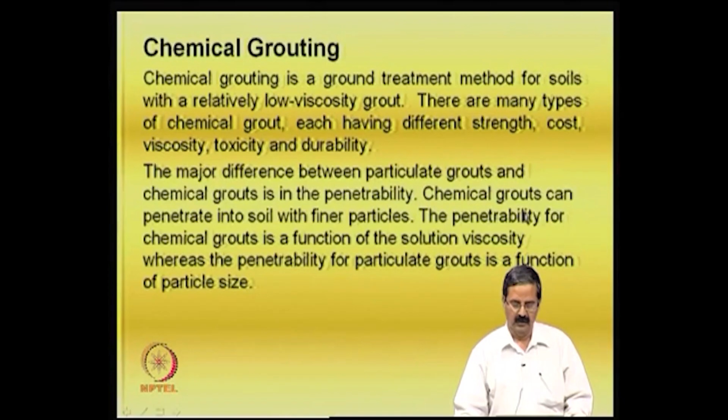function of particle size. This distinction is very necessary, because when you are trying to design a grout, you should know the size of the particles there. If the particles are somewhat coarser, one can go for particulate grouts, meaning particles in suspended form of bigger size. But when you want low viscosities, with the particle size being very low, you need to go for chemical grouts. This distinction is very essential.

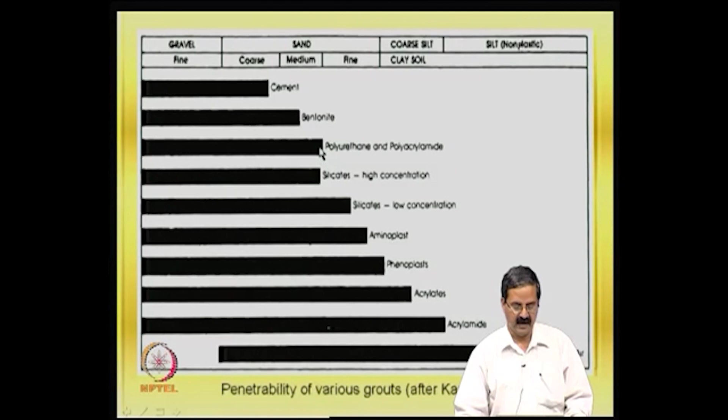You can see that chemical grouts have a big variation. Gravel, sand, coarse and silt sizes are here. Cement could be applicable to just this range, but cement plus bentonite or bentonite alone could be somewhat higher. Then polyurethane and polyacrylamide have somewhat higher ranges. Aminoplasts, acrylates and others have a bigger range of applicability depending on particle size. For example, this material could serve a big range of particle sizes, from gravel to coarse silts or clay soils as well

to some extent. With compressed air, if you inject compressed air into the system along with the grout, it enhances the whole process and can be useful in some of these grouting systems to increase efficiency.

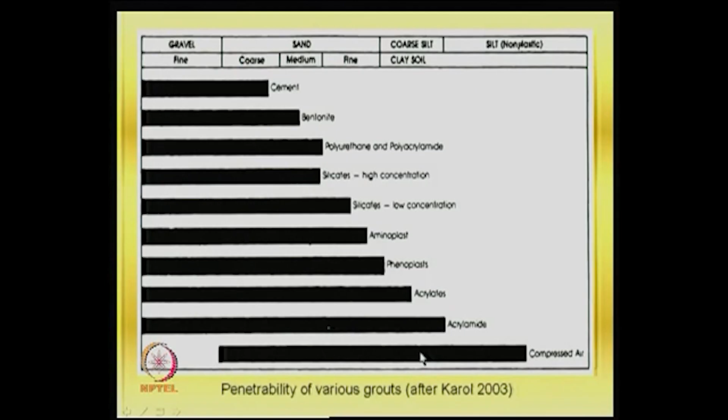This is another table that one should have a look at. Depending on the type of chemical grout, it could be sodium silicate, lignochromes, a variety of materials, and their properties are given here. The viscosity is given in pascal-seconds. Gel time is something we need to understand, meaning the hardening or setting time, and it is given in minutes.

Polyurethane reacts instantly with water, whereas aminoplasts take some time. Then strength in coarse sand: what order of strength do they get? You can see it is quite good in MPa. The unconfined compression strength of clay or sand could be very low, even 1/100th of this or much less. But by adding some of these materials, it gets improved by this much, which is quite good.

There are some issues like risk and toxicity, because they are chemical in nature, and so there is some risk associated with that. It can be a risk in terms of skin allergy and all that. Silicate, of course, is a household chemical. Phenolic resins are respiratory irritants, caustic. In some places acrylic resins are banned because they are neurotoxic, and respiratory irritants as well.

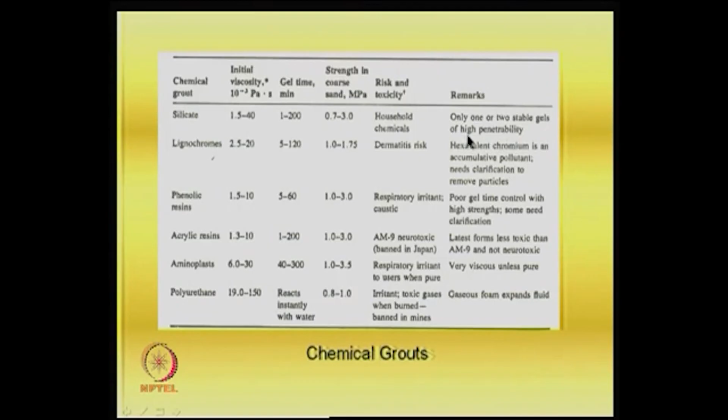Some remarks are also here about in what form it is better. For example, silicate - only 1 or 2 stable gels of high penetrability are there, and for lignochromes, hexavalent chromium is an accumulative pollutant and needs clarification to remove particles.

The other chemicals have poor gel time control with high strengths, for certain needs one should really do some sort of analysis, because the fact that you have so many chemicals does not mean you can use them directly. One should do a lot of studies with the chemistry background, and see that they are effective and also do not cause difficulties when handling in the field.

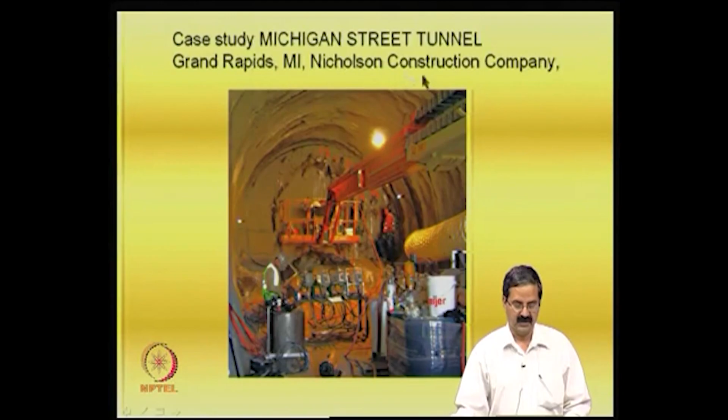I will give small examples here. This is in Michigan Street, where one construction company did this. This is a tunnel that was about to cave in. It is about 31 meters long, 6 meters diameter, constructed using the New Austrian Method of tunneling. This is one method for construction of tunnels.

Because the site's conditions primarily consist of fine sand, chemical grouting was specified to stabilize the sand and enable open face tunneling. Since a fine sand material is there, it definitely caves in, and to increase that strength when doing open face tunneling, one should stabilize it. That company stabilized it with a sodium silicate based grout.

The chemical grout was injected through 41 tube-a-manchette sleeves, each one over 100 feet long. These manchette sleeves were drilled horizontally to maintain an active undisturbed roadway above. The grout is placed ahead of what you are trying to drill.

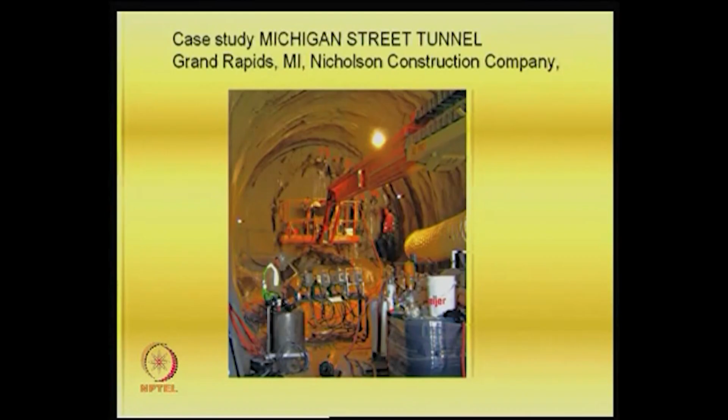The chemical grouting process created a treated mass of stabilized sand, so that the tunnel could be excavated with less risk of overburden collapse. If you are able to stabilize the area much before you start tunneling using this process, then it is fine. That is what this company did. It is a very important case study, very applicable to many of the conditions we have in underground water and all that.

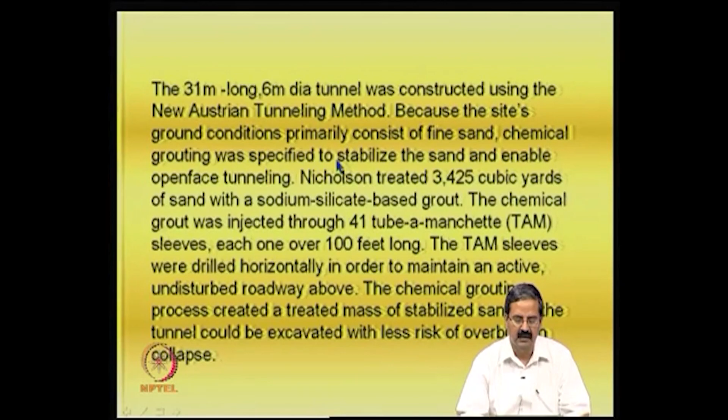Another important point is that there have been many case studies, particularly for underground water control. There is some literature that clearly says chemical grouting has been studied for about 30 to 40 years, and they are quite effective in controlling the infiltration and inflow of underground water into underground structures. There is seepage also.

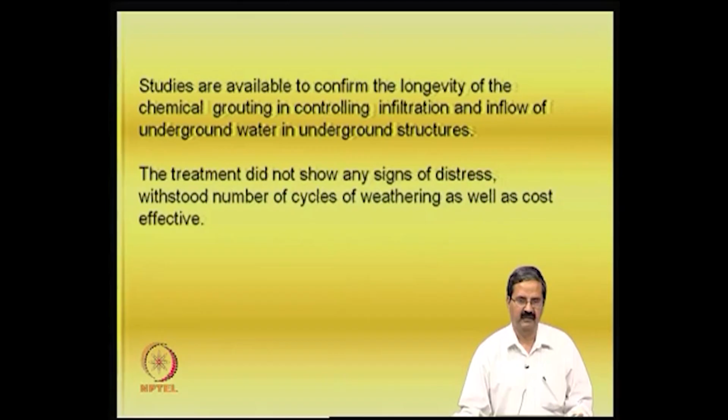How is it effective? Some experiments have been done which show that these materials did not show any signs of distress and withstood a number of cycles of weathering, as well as being cost effective. We always have apprehensions about whether it is going to be cost effective, whether it is going to be durable in the long run - after applying a chemical, after a few years it should not collapse, and whether it leads to other issues. People have studied this for at least some cases and shown that chemical grouting is definitely quite useful.

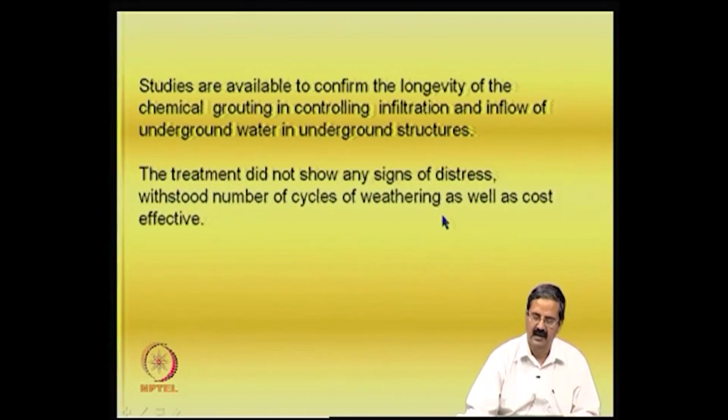I would like to stress on some more important points here. There is a spelling mistake, so rheology of grouts, it is here.

The rheology has three considerations: stability, setting time and viscosity. Stability is nothing but you consider the suspension stable if the particles remain in suspension until they reach a destination. Setting time is the time required for the grout to harden, and it is in the range of 4 to 24 hours depending on the additive used. Viscosity is a proportionality factor or constant relating shear resistance to the velocity gradient.

Like I said, there is a force applied, and they are all viscous fluids. Water is one example. Water has a very poor shear resistance, but when you start adding some chemicals or solids like sands or cement, then it achieves some increase in shear resistance.

So we also use a simple law where we assume, as I just mentioned, the coefficient of viscosity we calculate, and this is a simple example of calculation of viscosity here.

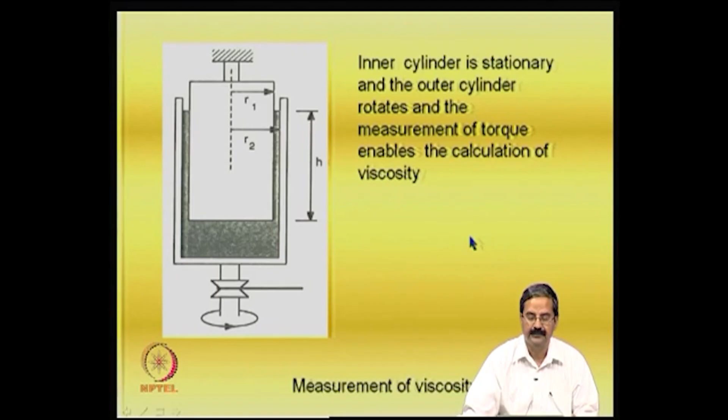In fact, people have been trying to understand the rheology of fluids particularly. So we have what is called frictional resistance, and we say it is a Newtonian model we use.

What it means is that this is a concept that we have. The way you want to model a grout is that the grout has a frictional resistance, and the moment you apply a force, it has some frictional resistance, and also it has what is called the viscous effects. So to model that we use a simple approach, and we call it a Bingham body.

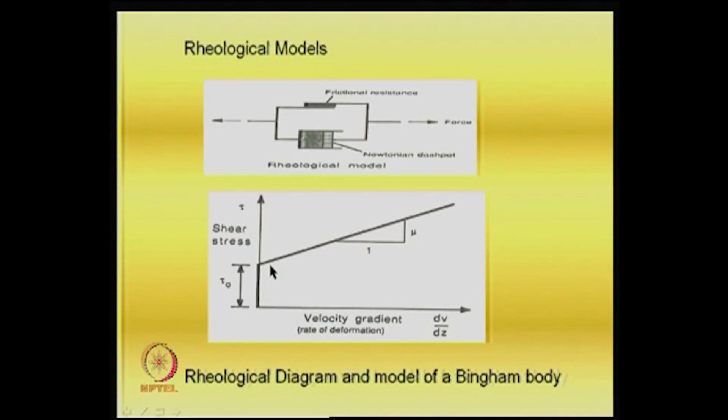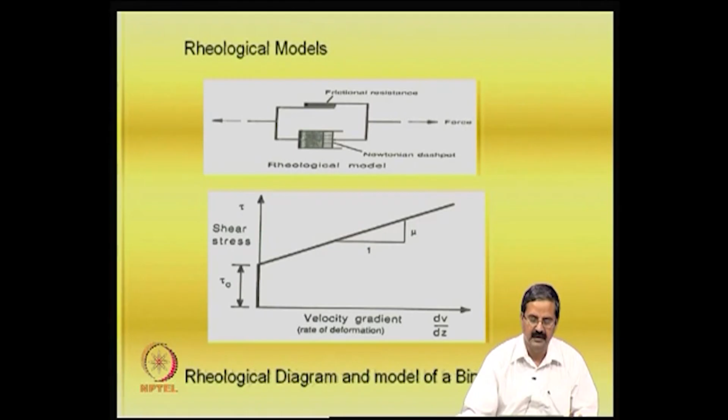Say, for example, in this case you start trying to allow the liquid to flow. It has to overcome initial shear resistance, which we call tau naught, and then as the velocity gradient increases, shear stress also increases. This is a simple law. We are familiar with Newtonian and non-Newtonian fluids; this we assume is a Newtonian fluid.

The rheological behavior of the Bingham body is expressed as tau equals tau naught plus mu dv by dz, and this particular term is called rigidity. A thin plate with rough surfaces is immersed in the grout, and the initial stress can be calculated from the amount of grout sticking to the surface.

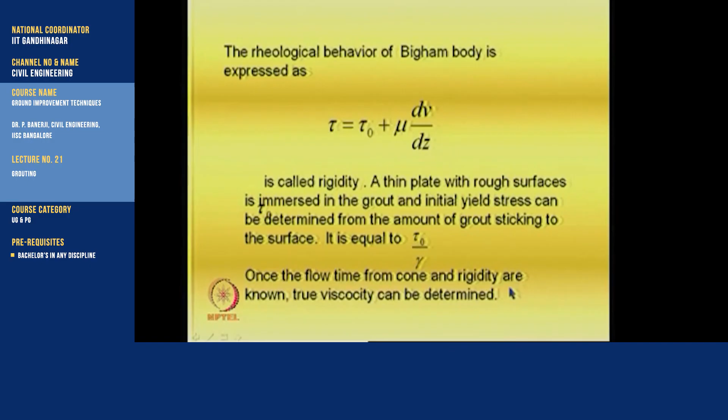We call it equal to tau naught by gamma. Once the flow time from the cone and the rigidity are known, the true viscosity can be determined. Actually, this is called the rigidity, initial rigidity.

The way we do it is you try to pass between the two plates, and once you pass through, you measure the amount of grout sticking to the surface. We know its tau naught can also be calculated, and its unit weight is also known.

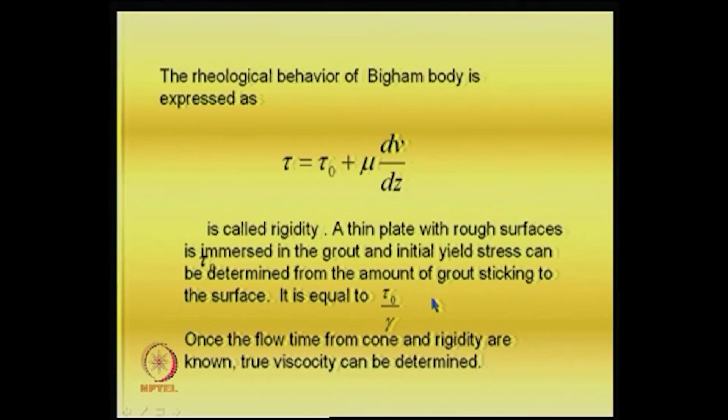So one can take that, and also at any point of time one can use this equipment called cone testing, the Marsh cone, in which you try to measure the flow. There is some simple relationship provided in literature showing, for these different times, knowing this initial T naught by gamma, how much time it takes to come out.

Flow time is measured for the first liter to flow through, like it's a 1.5 liter capacity. We assume how much time is taken by the grout mix for 1 liter of grout to come out, and once you know the time, you can find the flow ratio, say for example this is all in seconds.

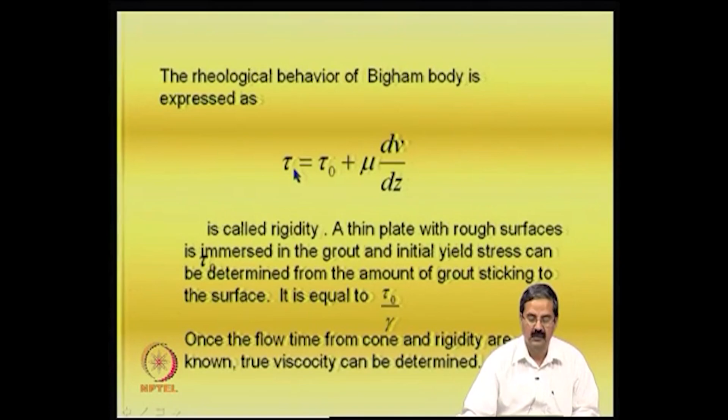Once we know T naught by gamma for that same material, as I just mentioned, T naught by gamma can be evaluated with the plates arrangement, and one can get an idea of the actual viscosity, because the objective is to get this value. So you will have this, and you know this, and you will be able to get some understanding of what is its shear, what is its viscosity.

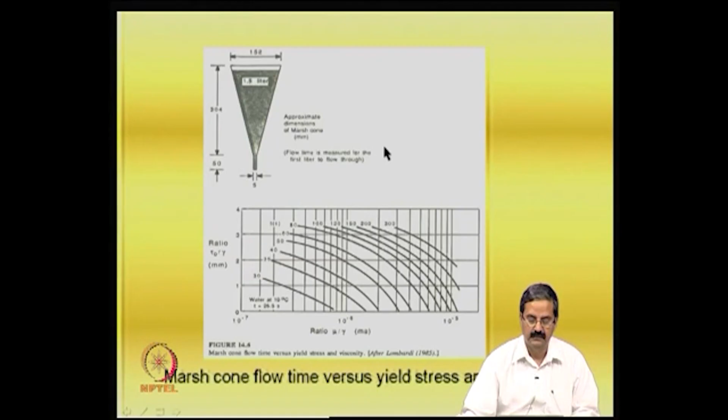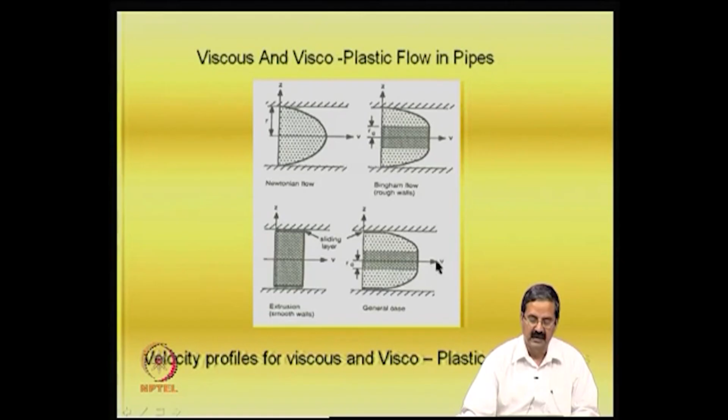There are also some more concepts on understanding the gravity flow of the grouts in terms of the viscous nature and the viscoplastic flow in pipes, and there have been somewhat mathematical models developed for this.

Coming to permeation, there are two types of models: one for strength improvement, the other for permeability improvement or reduction. Permeation grouting of soils needs an understanding of the spherical flow model for porous media, radial flow from the cylindrical cavity, and groutability of soils based on permeability.

Some understanding is given here regarding different types of solutions and suspensions, which have different levels of permeation and fracturing, in the sense that their applicability is clearly known.

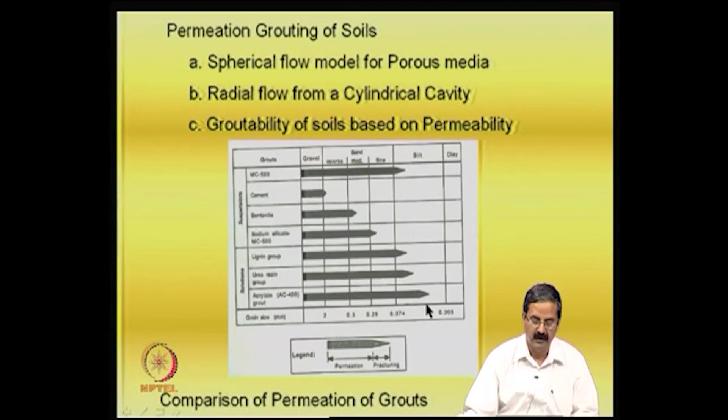Depending on, for example, MC 500 cement and bentonite, to what extent they are useful - bentonite is valid from gravel to sand, whereas cement is only for gravel. This is another type which can be a little longer. Similarly, in the case of solutions, this one is valid for a wide range of grain size distribution as a permeation grout.

This sort of laboratory work is important because finally you should be able to do the mix design properly, in the sense that you should be able to fill up all the cavities. Imagine there is some space available, roughly some meter cube of material, that pore space needs to be filled up, and you need time also for it to stabilize.

There are three issues: one is the space available to fill up all the pore voids, the grout required is another thing, and the setting time. It should set faster - if it takes a long time, it is no use.

Suppose you want to start the work, at least two days ahead you must complete the whole of that, and the material should get stabilized. Then you can start excavating, grouting using some of these methods, and then start working on, say, a tunnel project, so that it is safe.

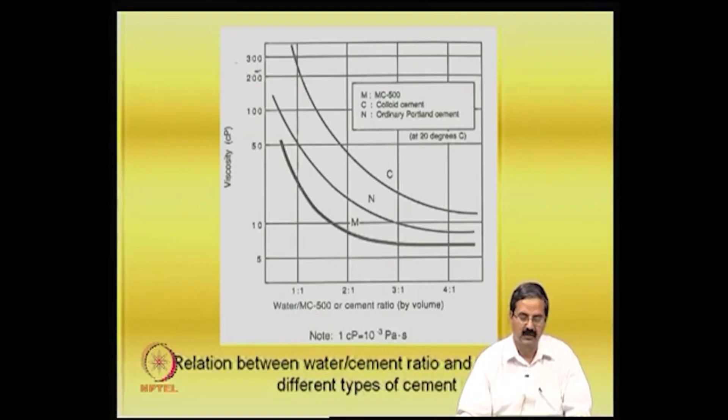Suppose in the case of rock joints and fractures, this is a very typical case in many problems in rock slopes, and there is some sort of understanding one should have. The reason this concept of viscosity is required is that you must be able to design, in some sense, what is going to happen.

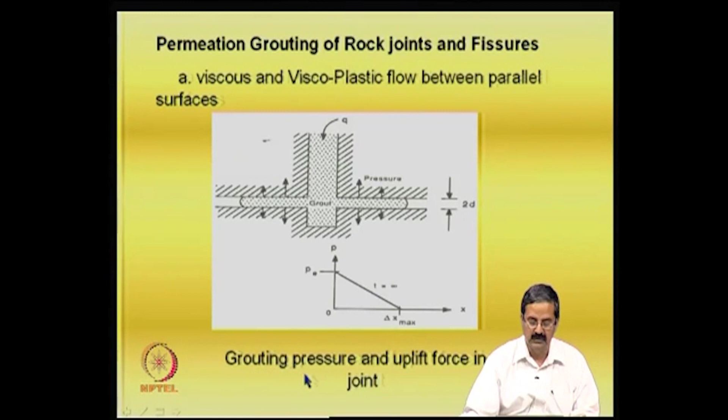So in this case, particularly for rock grouting, permeation grouting, when you are trying to use it for rock joints, we assume that you have this gravity, the discharge here, then it exerts some sort of pressure here in the form of a 2D, and you must be able to calculate the grouting pressure and uplift force in a joint, because it should not lead to hydrofracturing. Sometimes if the pressure is going to be higher, it could lead to fracturing of the rock itself. So one should be careful in some of these things.

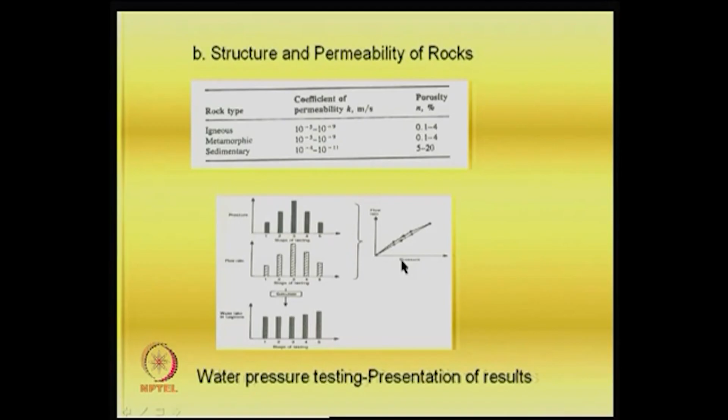Depending on the type of rock, we have different permeability coefficients and porosities. So in fact you apply some pressure, you measure the flow rate, and the amount of discharge is measured in terms of Lugeon units, where you do the in situ testing of permeability of rocks, and you apply some pressure and then monitor the flow rate.

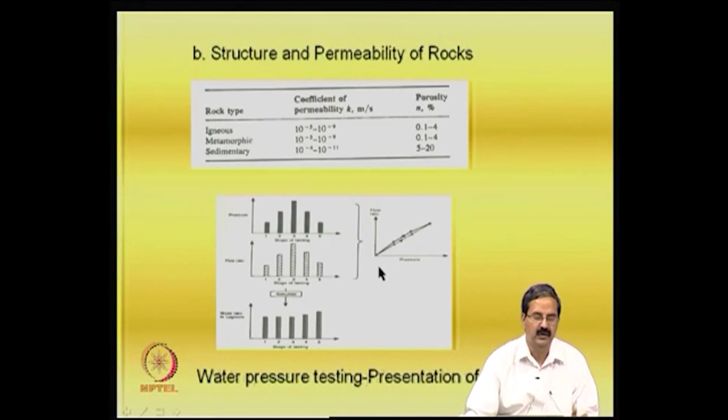So as you increase the pressure, the flow rate increases, and as the pressure is withdrawn, the flow rate decreases. So in this case there is no problem. This is similar to an elastic soil behavior, in which it did not lead to any fracturing problems. But I can show you there are some cases where, based on the type of response you have, you can understand what type of flow it is and what could happen.

This is a typical diagram in which the pressure is applied and the flow rate is monitored; this is a laminar flow. In the case of a rock slope, this is a laminar flow, because there is not much damage to the rock, and if there is a curvature here, we call it turbulent flow; it all depends on the size of the rock joint.

Then there is another example here, expansion of the fissure or hydraulic fracturing. What it means is that you applied some pressure, but during the unloading process, for the same pressure you have a high flow rate. You can see here that if I take the pressure at this point, the flow rate was less here, but during the unloading process there is a higher flow rate, which means that there is some sort of expansion of the fissure or hydraulic fracturing, which means that the pressure was higher.

Then another possibility is that you apply the pressure, then apply some more pressure, then come back, and the flow rate is still higher and it is somewhat not sudden, and it shows the washing out of the filling in the fissures. In fissures in a rock joint there could be many materials, and you probably removed a lot of the filling material during the testing. That is what it shows: there is a lot of filled-up material. So, these are all in situ tests.

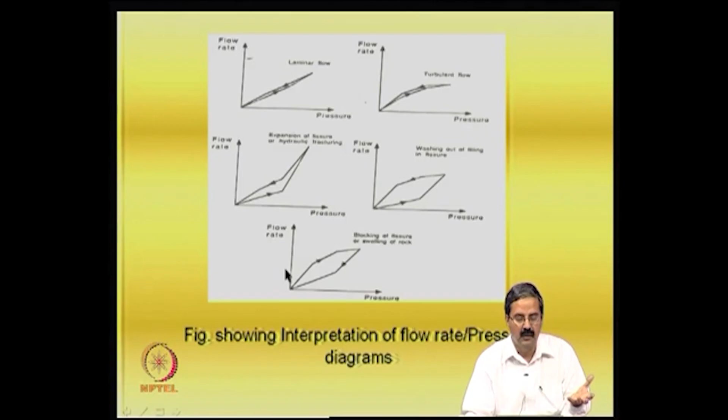Then there is another type that is called blocking of the fissure or the swelling of the rock. In this type, you increase the pressure, then during the reversal you see that the flow rate is much less, which is unusual, in the sense that we say that there is a swelling of the rock or the blocking of the fissure. So there was a block in that area. Sometimes people use this term called swelling of the rock, which is somewhat confusing, but that is one of the terms that is used in rocks as well.

So, based on some of these tests one can understand what the pore size is and what permeation grouting is required. This information will help a great deal in trying to design how to close these gaps. So, now I will take up some more examples on compaction grouting and jet grouting, because as I mentioned these are all very popular techniques.

As you have seen in the video as well as in some of the discussion, compaction grout is called low mobility grout, and it displaces and densifies loose granular soils, reinforces soils, stabilizes subsurface voids and sinkholes, and it displaces ground and improves the ground conditions.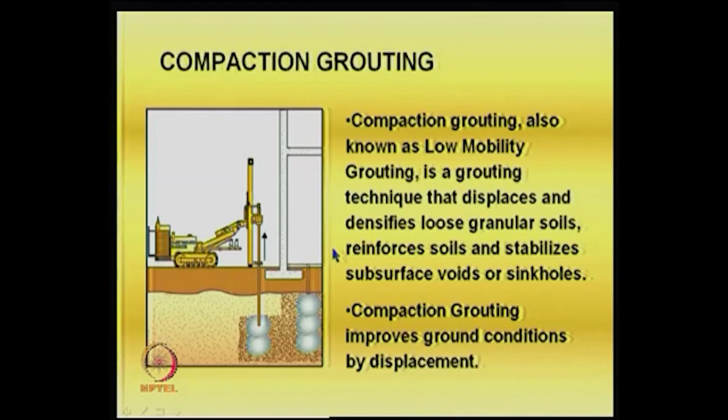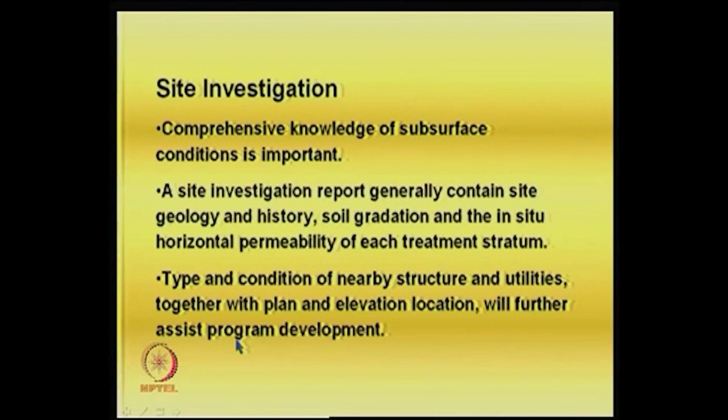If you want to do this, you need to have a very good soil investigation done, and you should have the site geology and history, gradation characteristics and in situ horizontal permeability of each stratum. The type and condition of nearby structures and utilities, together with plan and elevation, will also help in the program, because suppose you are doing construction in a highly inhabited or urban area, that cannot be done that easily, and you must be able to protect all the nearby buildings.

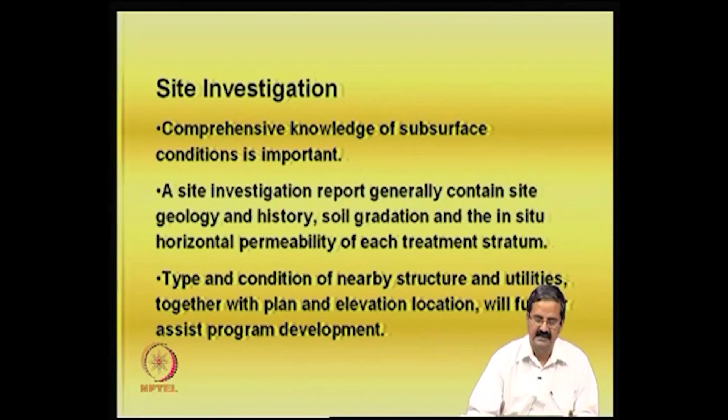Some of the geotechnical issues we need to understand are that the in situ vertical stress in the treatment stratum must be sufficient to enable grout to displace the soil horizontally. We are using this technique in the case of loose sands, and when you apply this, the bulb formation should take place and it should be able to expand. If it can't expand, we know that the soil is very good. So, the in situ vertical stress needs to be sufficient to enable grout to displace horizontally.

The grout injection rate should also be slow enough to allow pore pressure dissipation. This is another important variable. It should not be too fast, because there could be temporary pore pressure mobilization that could lead to a lot of other difficulties.

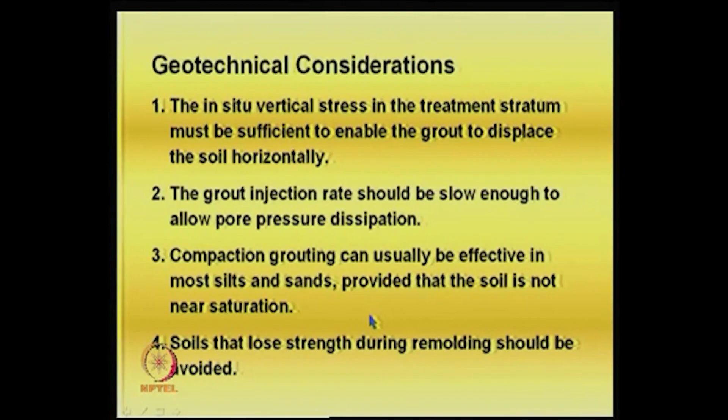Compaction grouting can usually be effective in most silts and sands provided that the soil is not near saturation. Similar to testing in sands near saturation, one should see that quick pore pressure mobilization is not there. So the soil should not be close to saturation, and of course it could take some time because you are trying to densify the system.

Soils that lose strength during remolding should be avoided. For example, as I said, clays have some strength reduction because of disturbance, and that disturbance should not lead to further settlements. So, we should avoid that type of material.

Greater displacement will occur in weaker soil strata. Excavated grout bulbs confirm that compaction grouting focuses improvement where it is most needed. Actually, the way the bulb forms is that it goes towards the area where the soil is weak. So the bulb formation is towards where the improvement is most needed.

Collapsible soils can be treated effectively by adding water during drilling prior to compaction grout injection. Collapsible soils are peculiar in the sense that they collapse with the addition of water. So the best way to stabilize collapsible soils is to add water, so there is a collapse of the soil structure, then do the compaction grouting. The combination of water addition and compaction grouting will make the collapsible soil into a better soil, so that one can do the foundation construction.

Stratified soils, particularly thinly stratified soils, can be the cause of difficult or reduced improvement capability. What happens is that the bulb formation is too restricted. For example, if they have alternate thin layers of dense and loose material, the efficiency of the process is less compared to a case where you have loose deposits which are uniform. There you have the best benefits.

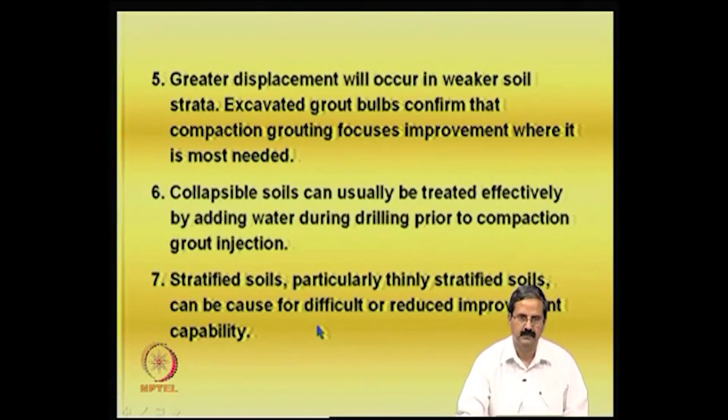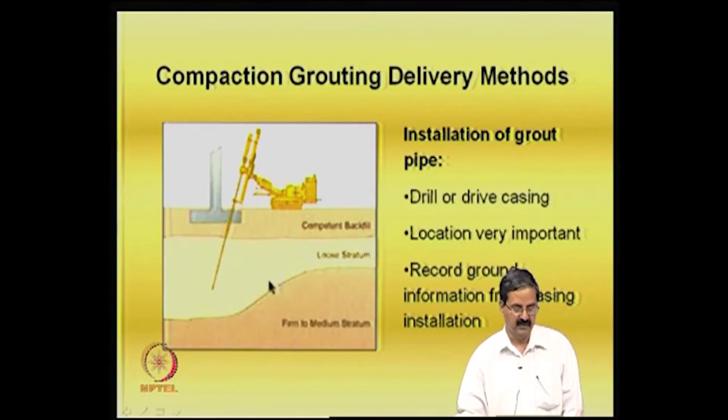So, as you just saw in the video, the procedure consists of drill or drive casing. You put the casing; actually, location is very important. Say, for example, this is all the loose stratum, this is a decent competent backfill, everything is fine, but you have a loose soil here. So, location is very important.

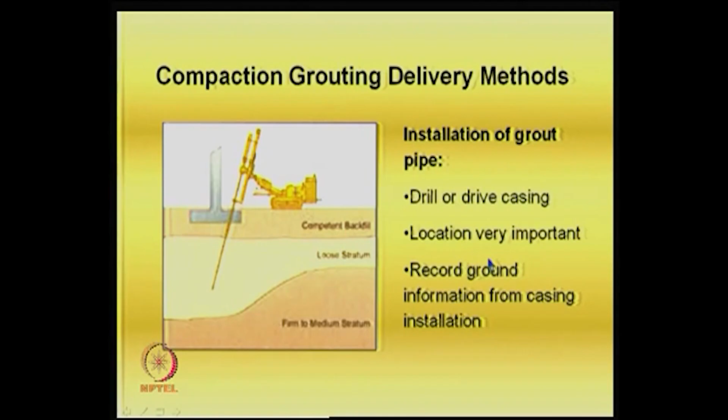Record ground information from casing installation. Even the way that you are putting the casing can help you to get some information about the strength of the soil. Typically it is bottom up, meaning we come from the bottom, but sometimes it can even be top down. So instead of from the bottom, it can be from the top also.

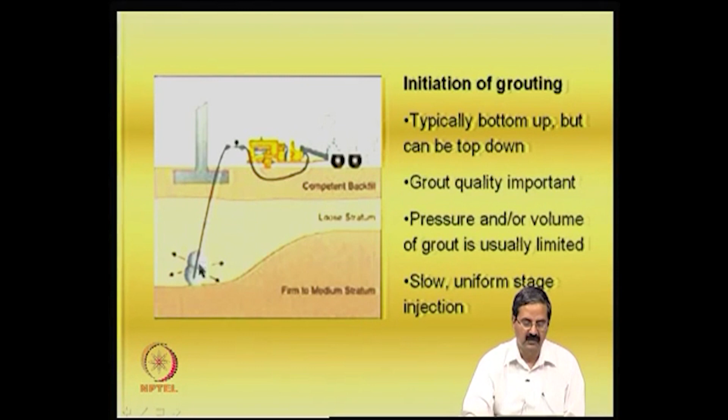Grout quality is important. We expect that you have done good research or a good mix design of the grout, and the quality is correct. You may do some laboratory work, but finally the contractor should be able to come out with this material in a proper way and put it. Pressure or the volume of the grout are usually limited, with slow uniform stage injection. So, you try to inject it slowly so that the formation of the bulb takes place and it is quite efficient.

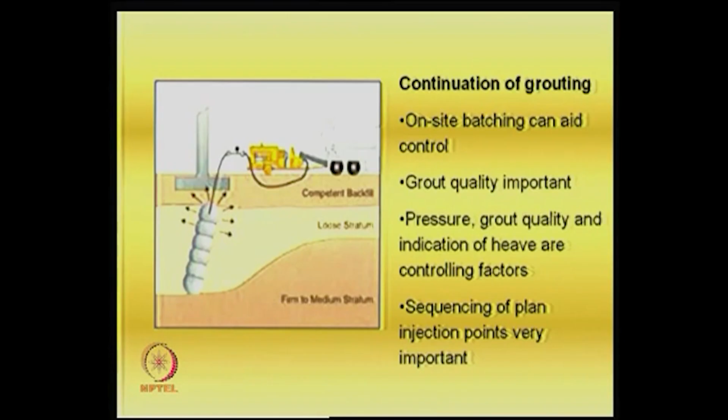On-site batching can aid control; on the site it can be done in batches. Pressure, grout quality and indication of heave are controlling factors. Sometimes ground heaving also could take place. The sequence of injection points in the plan is very important, like where you should start first. Once you have the total building plans, you must be able to decide where you should start first and how you proceed one by one; that is very important.

Typically pressures greater than 100 kPa are required to maximize densification. Limited densification can be achieved with less overburden, and this stress can come from overburden soils, surcharge and foundation loads. If the overburden is about 100 kPa, say for example 5 meters, 5 meters into 18 kPa is about 90 kPa, so at close to 5 to 7 or 8 meters this technique is going to be very effective.

So the densification is maximum in this range; that is what people have observed, particularly certain companies which have been using this technique very well. Limited densification can be achieved with less overburden, as I said. If the overburden is less, there is little confinement. So this stress can come from overburden soils; if the overburden is there, it is better, or if surcharge is there, it is better.

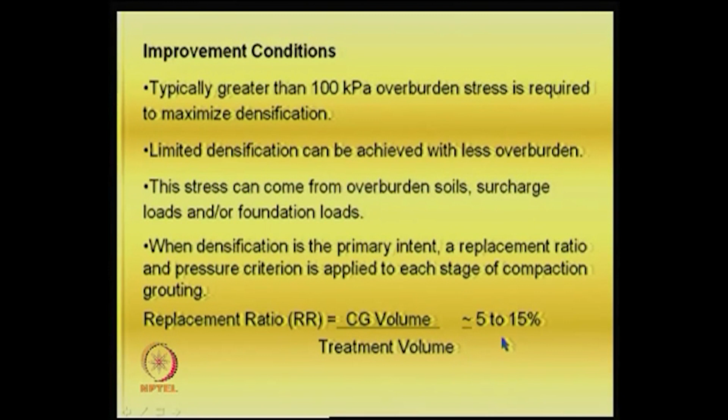When densification is the primary intent, a replacement ratio and pressure criterion are applied on each stage of the compaction grouting. We try to express how much replacement can be done. It is compaction grouting volume divided by treated volume. If it is 5 to 15%, it is considered to be good.

This ratio is determined based on the existing soil density range and the amount of displacement required to effect the improvement. So you must have a rough idea of the volume that you are going to densify. You must have the approximate volume of the voids you are going to handle, so that you get an increase in density using this ground improvement technique. Then the maximum pressure criterion that prevents fracture and ground heave and compensates for stiff zones is also important.

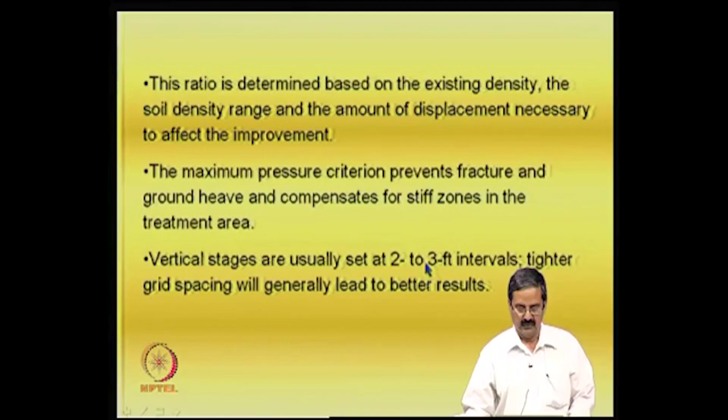Vertical stages are usually set to 2 to 3 feet intervals. Tight grid spacing generally leads to better results. These are some observations, and the applications are very good. As I said, it can be used in karstic regions where you have the formation of sinkholes, so one can use this technique.

The treatment usually involves drilling down to and into the limestone surface to locate and fill any cavities, followed by improvement of the loose soil above the rock surface. In many places in Germany and elsewhere I have seen these cavities formed because of natural phenomena, and the cavities can be closed using compaction grouting.

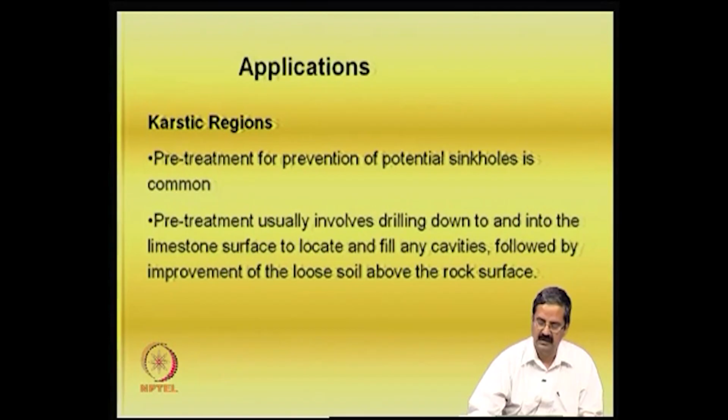You have a rubble fill, like a construction fill, which are uncontrolled dumps. Definitely one can stabilize them using this. To close the void spaces and minimize potential settlement impact, compaction grouting is applied in a regular pattern, particularly when you have rubble fills. So you should have a rough idea of the void spaces. Of course it is not easy, but you need an estimate, and you should have good quality control even in the measurement of grout going into the system.

Then poorly placed fills: suppose we know that the compaction is not done well for the fill, then if there is sufficient overburden, a proper program of compaction grouting can treat the poorly placed fill material. I have told you about a case where 10 meters of filling had to be done.

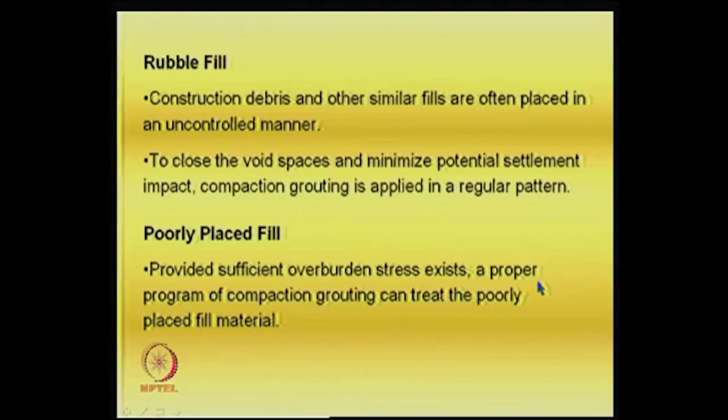The first 2 meters were not done well, the next 2 meters were okay, then the next 2 meters were okay, but suppose after 5 or 6 meters of depth you realize, based on the CPT or SCPT tests, that the soil is not good at a location. The best way would probably be to find out its density, back calculate certain things, and find out if you can densify that area. So poorly placed fills also could be stabilized using compaction grouting.

Then loosened soils: construction-generated ground disturbance can often be the cause of loosening. Because of construction-induced vibrations, there is a loosening of the soil structure, and that could affect a lot of buildings. In some cases, if you try to do some excavation here, there is a possibility of instability occurring, and that could lead to some problems.

So one should really analyze this problem and effect the improvement. You can use this technique and inject the compaction grout soon after the disturbance occurs, and it can compensate for the disturbance by re-establishing the original stress and preventing deformations beyond the working area. Suppose you know there is likely loosening; one can do pre-treatment.

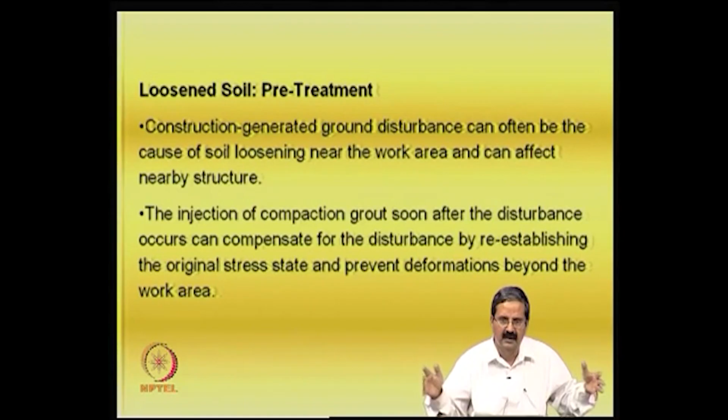There could be ground movements because of certain excavations and refilling. If you remove the soil here, there is a possibility of disturbance of the nearby soil stratum. There will be stress release, because when so many cubic meters of soil are removed in one area, all nearby areas tend to relax, since the soil under their foundations starts moving towards the excavated area, and one should stabilize that. So one could anticipate those things and then stabilize.

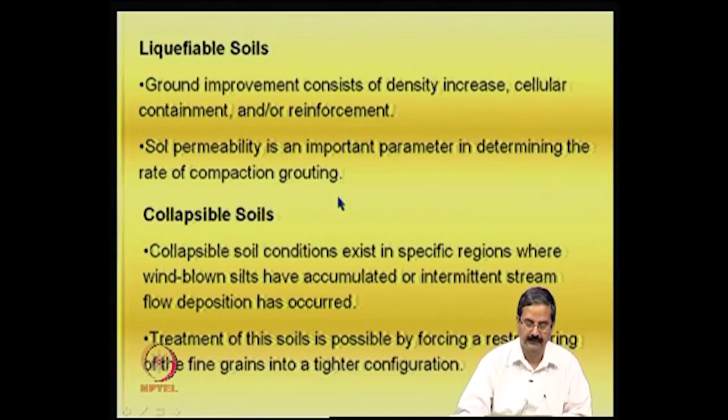Of course, it can be very effective in liquefiable soils also, and the ground treatment consists of density increase, cellular containment and reinforcement. Soil permeability is another important parameter in determining the rate of compaction grouting. It is also very effective in collapsible soils, as we have seen.

So the advantages of compaction grouting are that it can treat the area pinpointedly, speed of installation is good, wide application range, effective in a variety of soil conditions, can be performed in very tight access and low headroom conditions, non-hazardous, no waste spoil disposal. Sometimes with certain techniques waste is generated, like 10% or 5%, and there could be disposal difficulties. Here, since you are using a particular grout, such possibilities are less.

No need to connect to a footing or a column. In some cases it is required to connect to footings or columns if you use some techniques, but here there is no such requirement. Like if you are trying to put some pile foundations, they should be connected to the original structure, because they have to take care of the load. Now imagine that the particular pile group is not able to take care of the load, and then there is a possibility of differential settlement.

So you need to put additional piles, and they have to be connected to the original system so that there is proper load sharing. But imagine that it is not done; then it is a serious structural problem. In this case, by improving the ground all round close to the pile foundations, for example, if you design the piles based on skin resistance and shaft resistance and that is going to be a little higher, then it is fine.

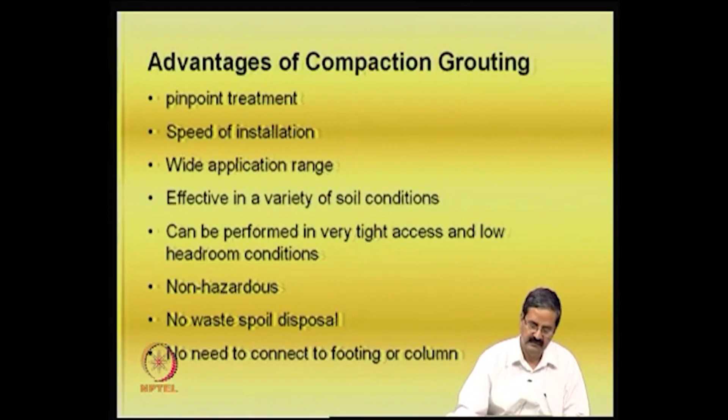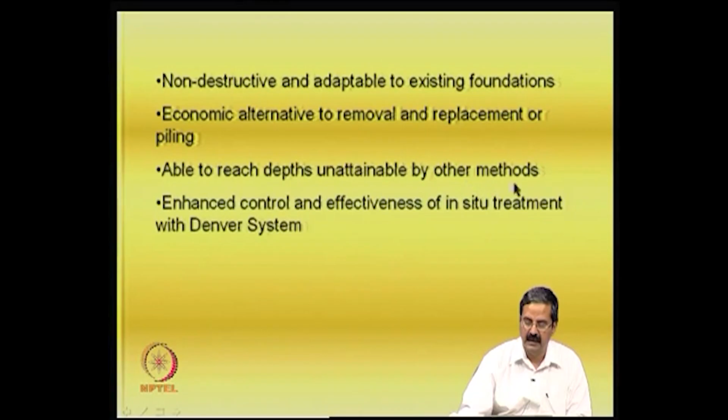So, non-destructive and adaptable to existing foundations, an economic alternative to removal and replacement or piling. Able to reach depths unattainable by other methods, enhanced control and effectiveness of the in situ treatment with Denver System.

Just small examples, like in a wastewater lift irrigation scheme, the shaft was designed as a series of 10 feet deep concrete ring sections installed from the top down. For a water supply treatment plant or whatever, you need to construct a vertical shaft. How do you construct a vertical shaft? You have to have a series of rings and place them.

If you want to do this, you have to stabilize; it is not easy to do this sort of construction. For example, as I just mentioned, it is more than 12 meters deep, and about 30 feet in diameter. The diameter of the shaft is about 10 meters. The material is uncompacted native silty sand.

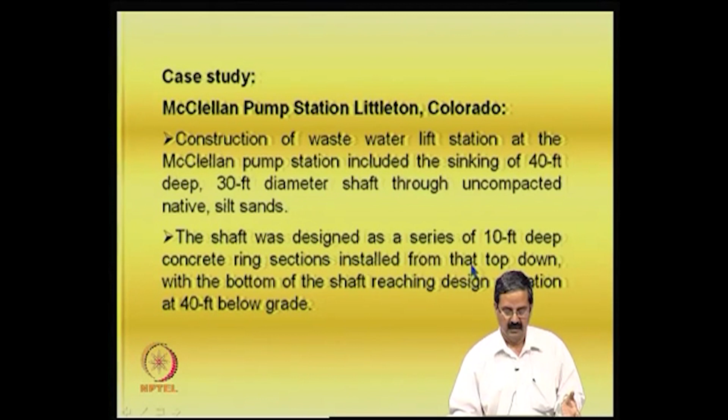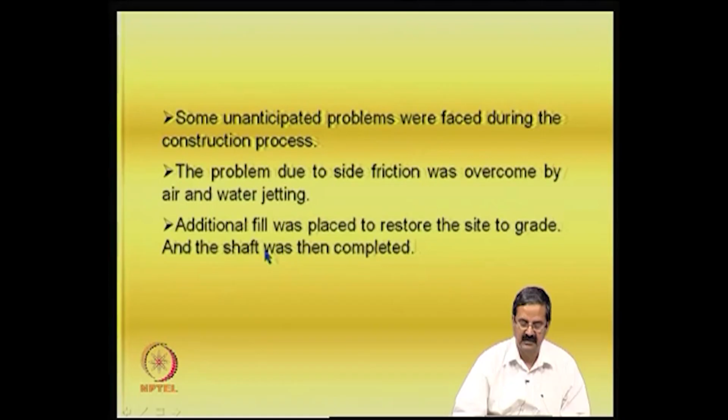What they found was that there were some problems they were facing during the construction process. Finally, the problem due to side friction was overcome by air water jetting, and additional fill was placed to restore the site to grade. So, it is possible to solve some of these issues in the construction of vertical shafts in this manner.

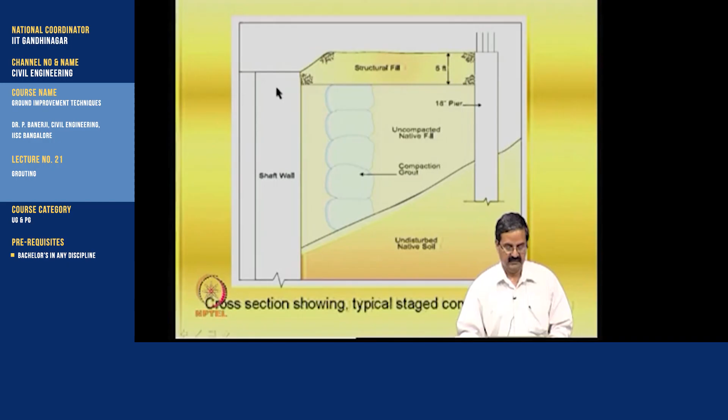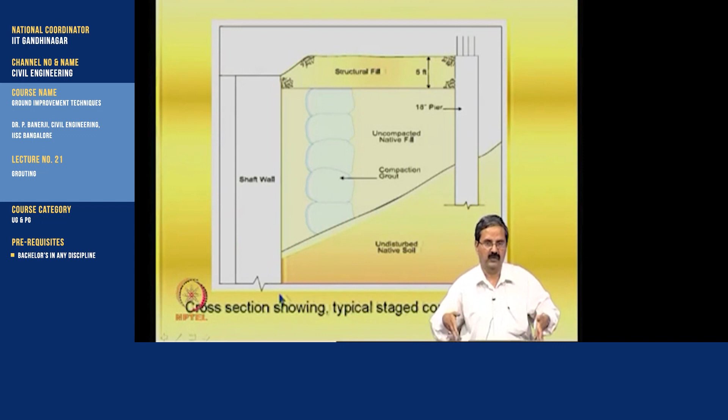This is a shaft, this is a structural fill, and this is how it is done. Normally, to do a shaft like this is not very easy. Think of a well of, say, 10 meters here. If you want to do that, the problem is that you should design for these earth pressures, and there will be a lot of problems, and the soil is so loose.

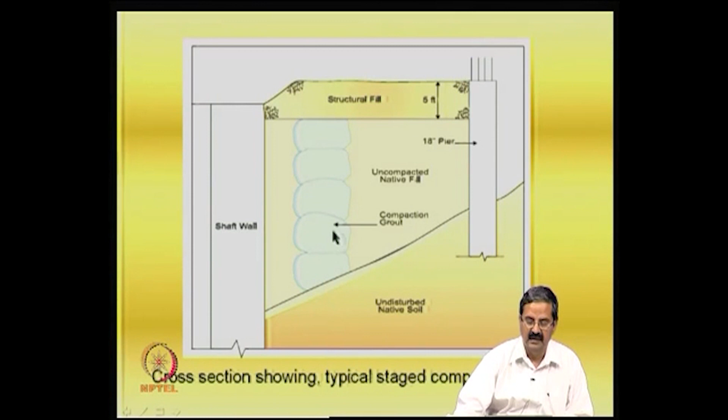So, the technique was that they are placing the rings. How do you place the rings? It is not easy, so what they did was that compaction grout was placed here and the whole area was stabilized, and the earth pressure coming on this was less. So, this is how it is done. That is about compaction grouting.

Now, I will give some more examples on jet grouting. As I said, jet grouting has 3 types, we will see that. Jet grouting is a grouting technique that creates an in situ geometry of soilcrete. Instead of concrete, we call it soilcrete here, using a grouting monitor attached to the end of the drill stem. The grouting monitor is advanced to the maximum treatment depth. High velocity fluid jets are then initiated from the ports in the side of the monitor.

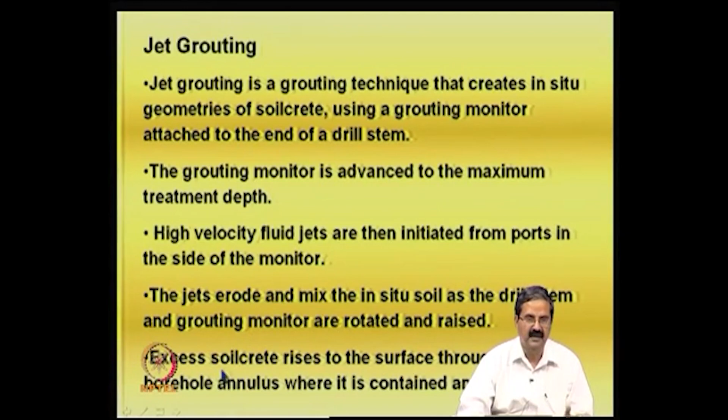Like you have seen, there are single, double and triple jets, and the jets will come. These jets erode and mix the in situ soil as the drill stem and grouting monitor are rotated and raised. In this process the material gets mixed up, and the soilcrete is a densified material; it is a grout mix actually. The excess soilcrete rises to the surface through the borehole annulus where it is contained and disposed of.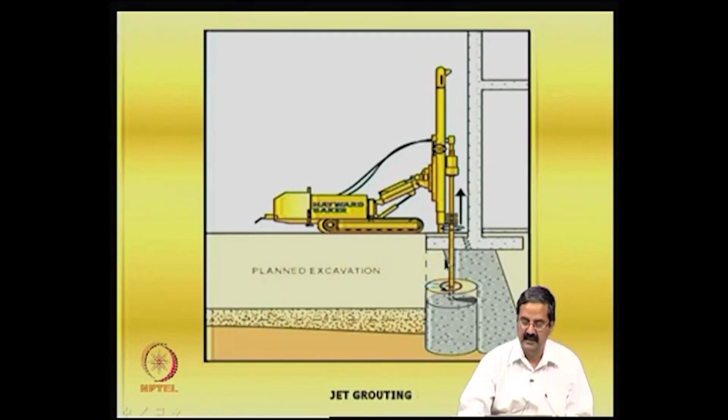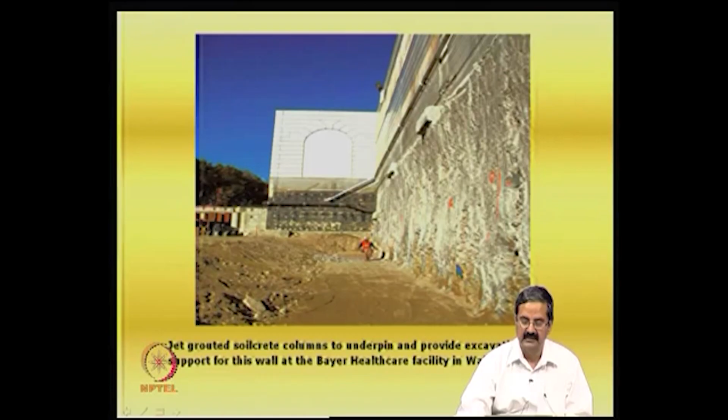This is an example of jet grouted soilcrete columns to underpin and provide excavation support for this wall at a Bayer Healthcare facility. You have a building just next to it. It is not easy to go for an excavation like this; it is so tough. So, they used the method we just saw, and now there is no stability issue at all.

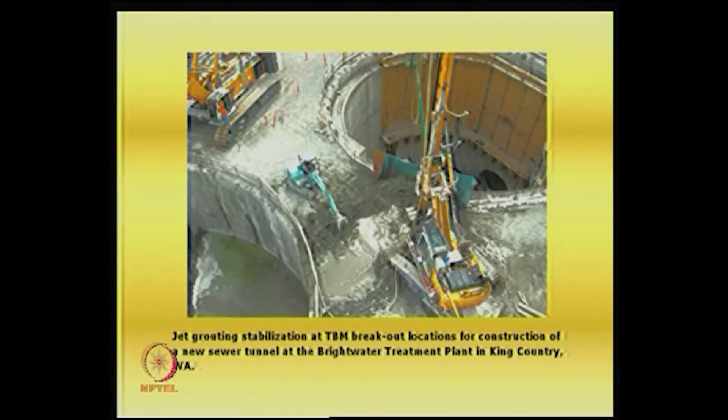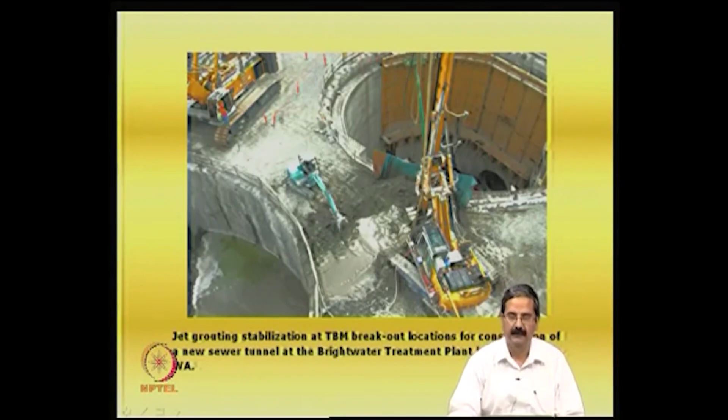Jet grouting stabilization at another place for the construction of a new sewer tunnel. So these are all the shafts, vertical shafts and tunnels. Imagine that you need to construct vertical shafts and tunnels and stabilize the whole area - it is not easy. These are all very complicated structures. Particularly, design may be easy, but doing construction is not very easy. It is very challenging, and one should really see that whatever geotechnical issues arise do not create difficulties in the erection of these facilities.

So depending on the application and the soils to be treated, there are 3 primary systems of jet grouting. A single fluid system called Soilcrete S, where we have a single fluid - the injection of the cementitious grout slurry at high velocity to erode and mix with soil. This was the single jet. I showed you that example, I will show you again.

Then the double fluid system, Soilcrete D - S is single, D is this thing. The injection of the cementitious grout slurry at high velocity, sheathed in a cone of air at an equally high velocity to erode and mix with soil. So you have grout slurry plus air. Then you have the triple fluid system, Soilcrete T, in which you have water plus air plus the grout, all 3 coming together. It is a double fluid system - grout plus air - and the triple fluid system term.

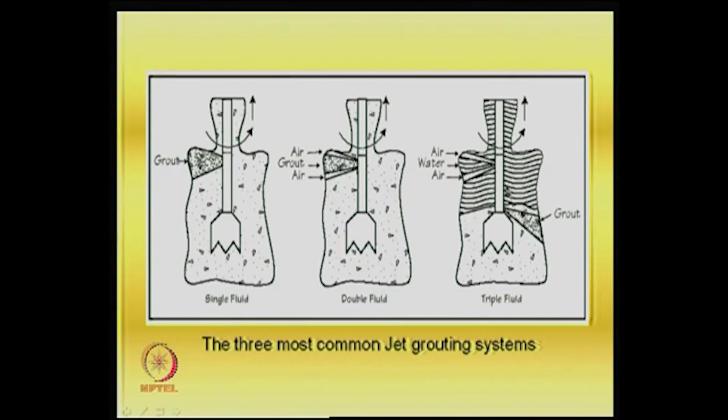There are more variations of these systems than the systems themselves, but in most cases they are a bottom-up process, like we try to do from the bottom. This is to say that they use hydraulic rotary drilling to reach the design depth, and at that point initiate the jet grouting parameters and produce procedures to create a cementitious soil matrix, commonly called soilcrete.

During grouting, the borehole annulus must be large enough to permit unimpeded up-hole spoil return. While in the annular space, when you are trying to do that, the spoil should be able to come up. This allows for control of the in-situ vertical stress environment. A lack of this spoil return will result in hydrofracturing of the ground and loss of control, which can lead to extreme inconsistencies in the soilcrete quality and geometry.

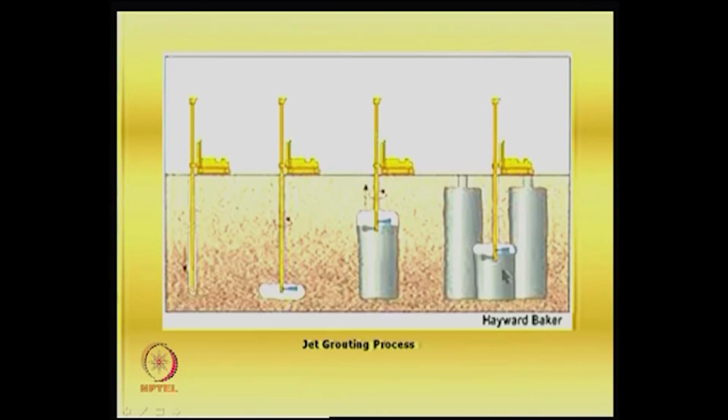These are some issues that they have - again you can see the jet grouting process and the way it is done, single jet. Yeah, this is how it is done. Pre-drilling or foundation coring may be necessary to access the treatment zone.

Other emerging jet grouting systems include SuperJet and X-Jet. There are some advanced systems as well in this case. The Superjet system is a double fluid system reliant on specialized tooling and high injection energy for enhanced erosion capability, maybe up to 5 meters diameter. What is that erosion capacity? It is in terms of the diameter of the column we are thinking of. So if you have a Superjet system, it needs about 5 meters - it can create 5 meter diameter columns.

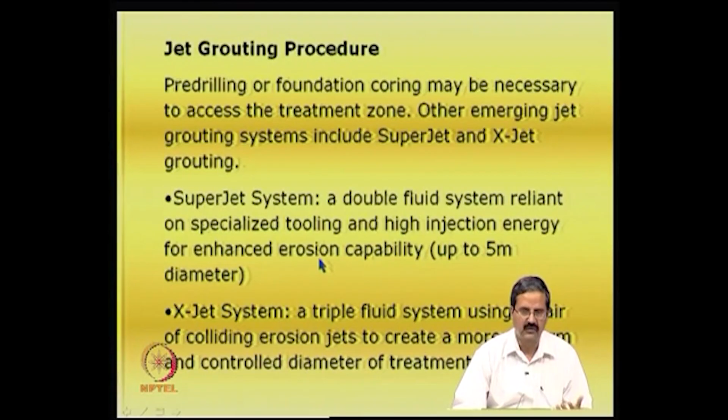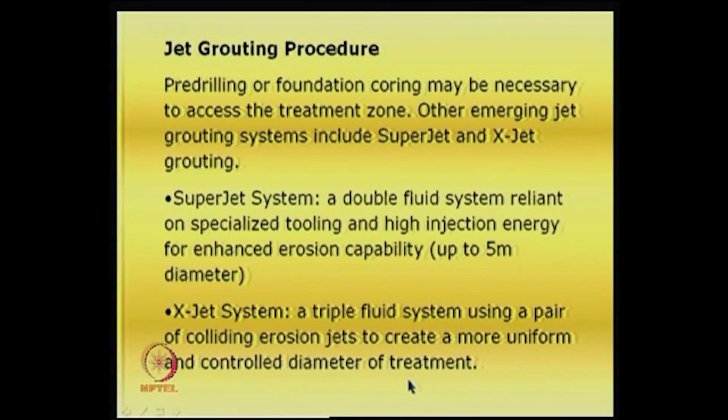Think of very soft soil, Japan, and many places in India as well - this is the way they have been doing it. We know some institutes in Saga and other places where soil is so soft that they have to go for advanced ground improvement techniques like this. The X-Jet system is a triple fluid system using a pair of colliding erosion jets to create a more uniform and controlled diameter of treatment. They have colliding jets here - that is the difference.

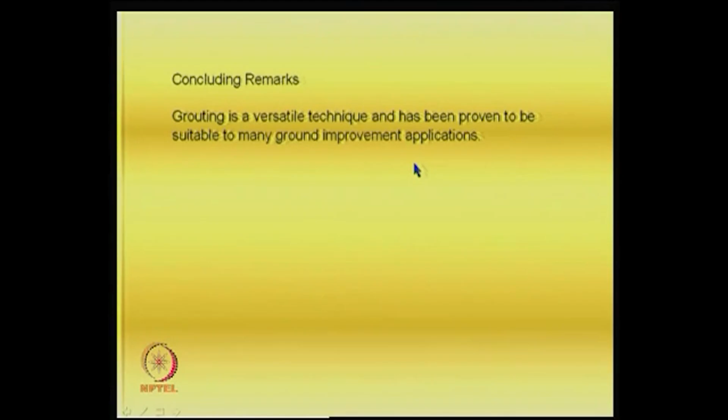So what I would like to show you is that grouting has been a very versatile technique, proven suitable for many ground improvement applications, and these are all the references that I have followed for this.

Before I conclude, I think we should have a look at some of the videos again, so that it enhances your understanding here. As I just mentioned, this is a triple one.

As I just mentioned, this was done in India also by Keller and other groups of companies - there are companies doing business in these lines. You can see grout and air coming. You can see that the spoil, whatever it is, can come out with that as well. So you have air, water and the grout.

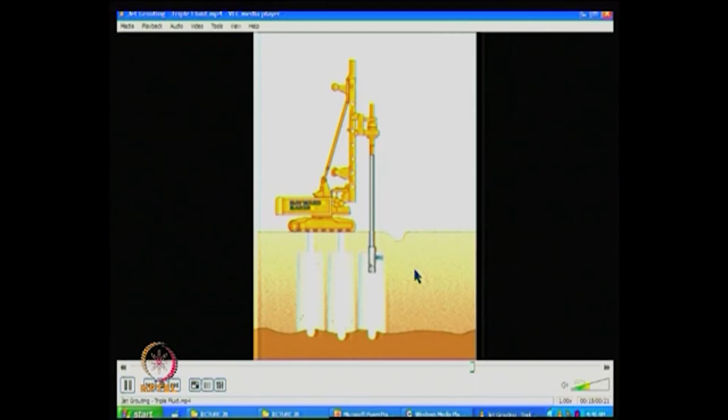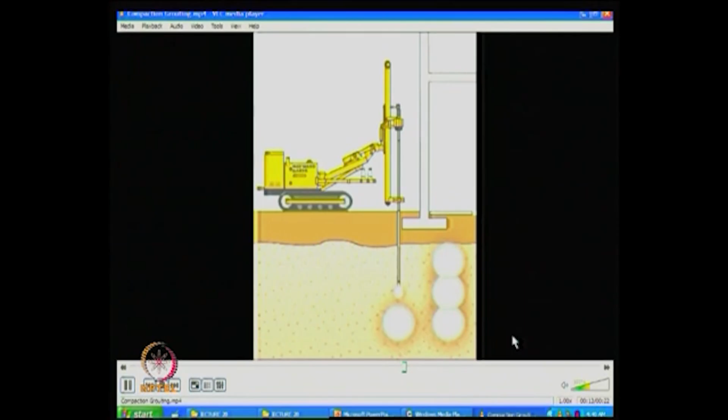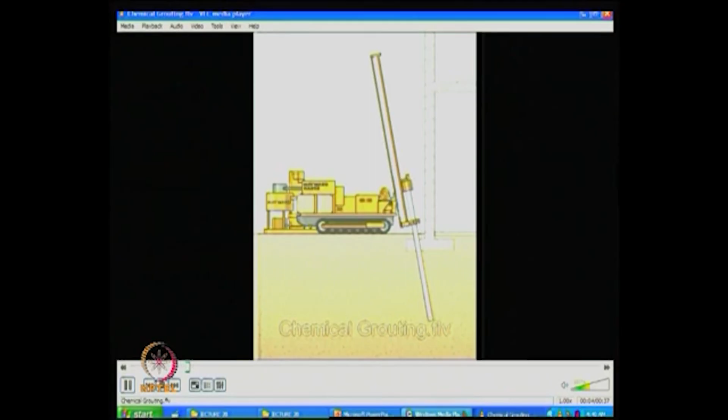You can also have a look at compaction grouting, the way it does things. Here you can see that it is somewhat slower, as I just mentioned. The pore pressure mobilization and dissipation are all quite important. It has a different way of working, as you can see.